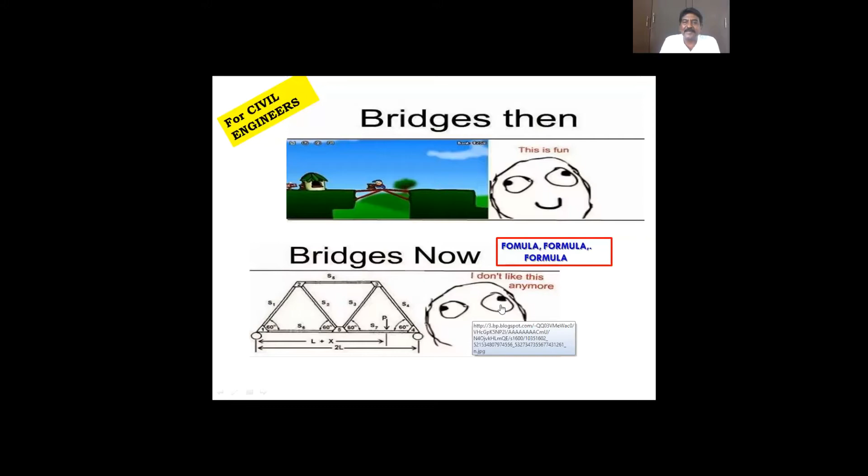But after becoming civil engineers, we were flooded with formulas, method of sections, method of joints, everything. And now we see not only bridges but all civil engineering structures through formulas. But that should not be the way of learning. You must have a passion and love towards our work. Then you will become a successful engineer.

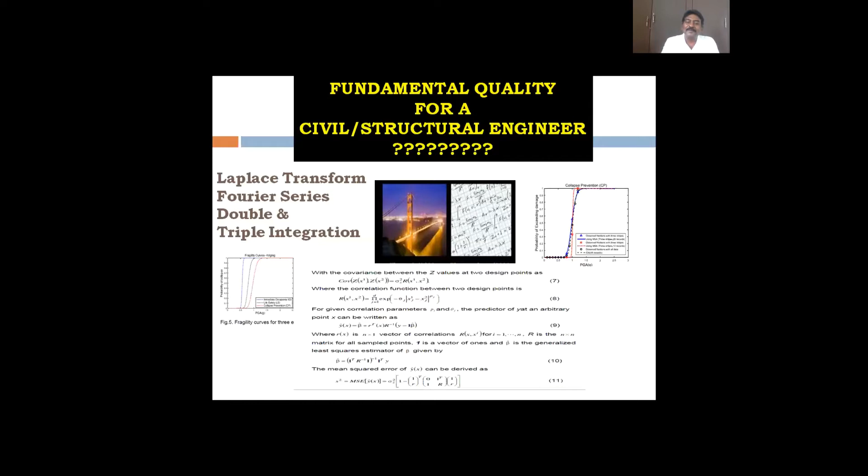What we are taught as a fundamental quality for a civil structural engineer is Laplace transform, Fourier series, double and triple integration, and so many other things. But just forget about all those things, and then you can become a very, very good structural engineer.

What you should learn? You should have common sense, that's all. Any engineering is nothing but common sense. You can become a successful civil engineer or structural engineer if you have good common sense.

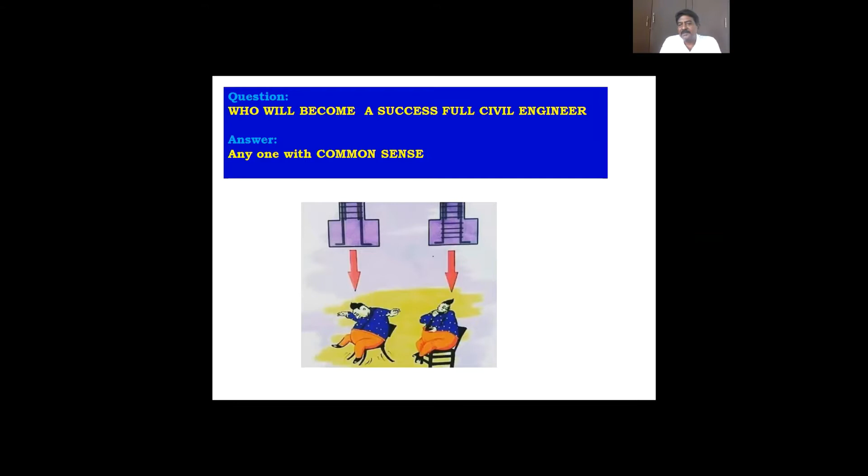For example, when you see a section of a footing with column rods going inside, its analogy is a chair without ties. Vertical legs are there, no ties, it will split and spread away. Whereas just by putting some stirrups, lateral ties in the rods, it will not spread. Such an approach, such a feel you have in civil engineering or structural engineering, then with common sense, you can make a great success in your career.

But there is always a stage, converting a fresh engineer or beginner into an experienced one is the toughest job. Because a fresh engineer needs experience, but job providers need an experienced person. So there is a little gap. So when you join a job, you can become a successful civil engineer by learning not only from books, but also from practicing senior engineers, whether directly or indirectly, by attending these types of webinars or reading technical books.

When I was young, in the late 90s, 98 and 99, I was assigned the job of analyzing the stability of this huge statue, which is called the Thiruvalluvar statue, located at Kanyakumari in Tamil Nadu. Its height is about 133 feet. Such a huge tall structure proposed on a coastal area, made up of pure stones only.

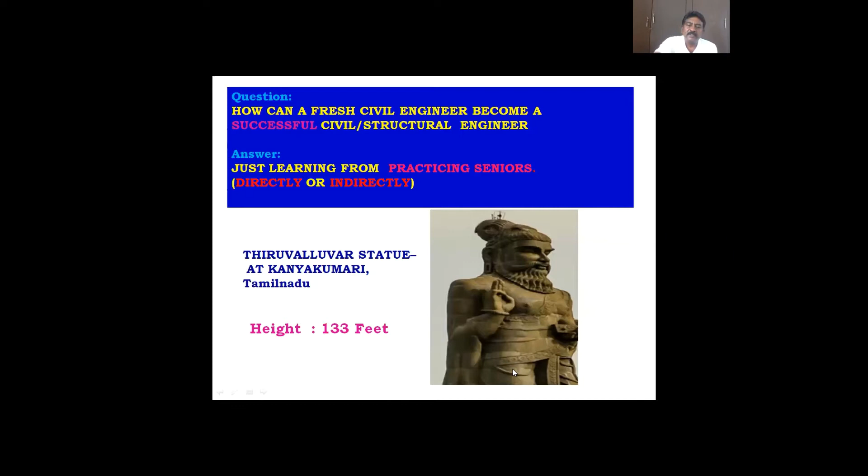This is the Thiruvalluvar statue. Tamil people know the Thiruvalluvar statue will be like this. The portrait of Thiruvalluvar traditionally has the bun, the hair arrangement vertical, like an inverted cone. This is the actual portrait of the Thiruvalluvar statue.

When I was given the drawing, at that time computers were not so popular, not handy. So I was given a sketch by a Sthapathi, a skilled mason. He gave me the hand sketch, and I embossed it or placed it on a big graph sheet, and counted the area at all stages, starting at foot, leg, hip, neck, and I at last came to the head also, then the bun, the vertical portion.

The formula popularly we use to find out the tension created in the masonry structure - we must avoid tension in masonry structures - is stress equals P by A minus M by Z. This P by A is our favorable stress, due to the weight of the structure. But this M by Z is the overturning stress, our unfavorable stress.

When I checked the stress at the hip level, neck level, or foot level, this factor was high because the load P, the self-weight, was higher at bottom. When I go further up, this first term became very, very small. Whereas because of this high wind force, this overturning term became so large.

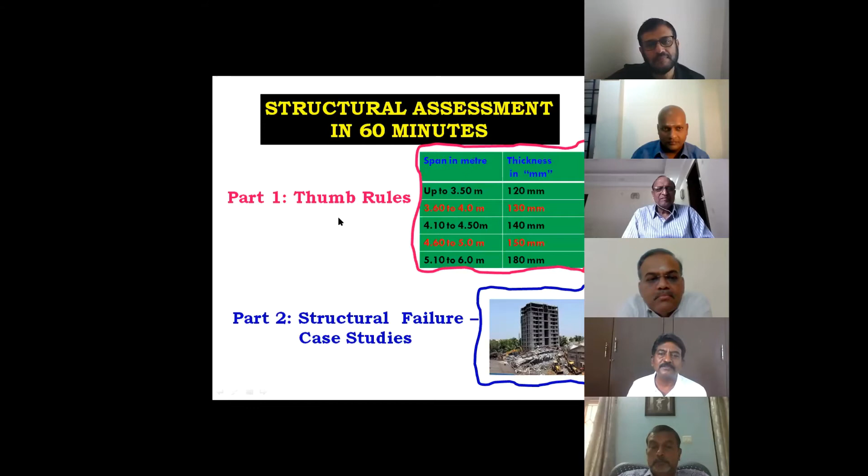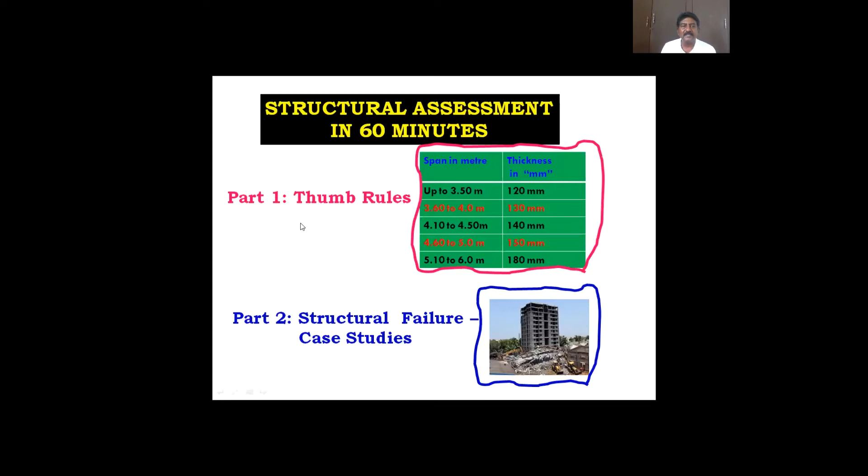Very easy thumb rules. Next we'll cover structural failures with one or two case studies. When I say thumb rules, I will show you how to calculate slab thickness in a few seconds just by looking at the building, and how to assess the size of beams by observing the span. It's very simple—learning structural design is learning only four things: slabs, beams, columns, and footings. These four elements make the entire structure, and learning them is what we call structural engineering.

Normally slabs carry the loads, but architects, builders, developers or users want only the slab—they want to take rest in the slab. They don't want beams, columns or footings. But we civil engineers have to transfer the slab load to the beams, from the beams to the columns, and from the columns to the soil through the footings. Though it sounds childish, brick wall loads go to the beams, then to the columns, then to the footings. If the person in charge of that building which failed in 2014 in Chennai had understood that wall load must go to the column through the beam, he could have avoided the failure or cautioned the concerned persons. So the understanding is: load must go from slab to beam, beam to column, column to foundation.

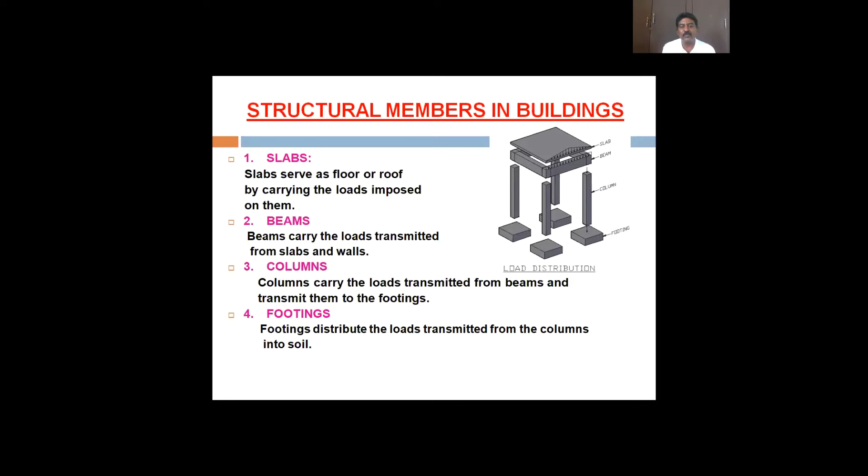Suppose your brother, who is buying an apartment, asks whether the slab thickness being provided under construction is okay or not. Many things will flow to mind—L by 26, L by 32, modification factors, curves—but nothing useful will come out of our mouth. Your brother will wonder how you're in the final year of civil engineering yet can't assess the thickness of a slab. So there's a thumb rule that a group of structural engineers developed themselves for quick appraisal, and this is what we follow.

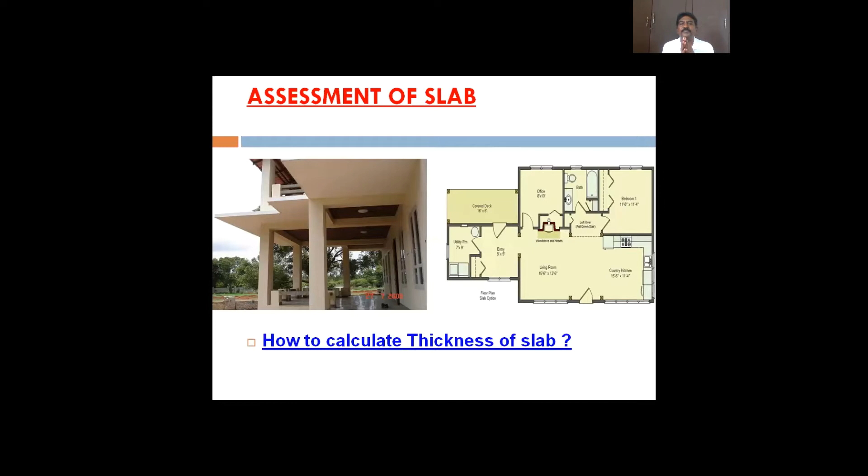For a slab, suppose the short span of the room or hall is 5 meters. Just multiply by a coefficient of 3. That gives 15 centimeters, or 150 mm—that will be the slab thickness. I'm staying on the conservative, safer side. Suppose the short span is 6 meters—multiply 6 by 3, which gives 18 centimeters, 180 mm, or about 7 inches, as the slab thickness.

Similarly, if the span is 4 meters, 4 into 3 gives 12 centimeters. Just by multiplying by 3 you can appraise whether the provided slab thickness is adequate. I've also provided a table with more accuracy for varying spans, like 3.5 to 4 meters, but this rule you can remember by heart. However, it won't hold good for cantilever slabs. There are two vulnerable structures in our buildings—one is the cantilever, the other is floating columns—with which we must be very careful. For cantilevers, the thickness to be provided will be span by 10.

Suppose you're providing a 1.5 meter span. When I say span here, it's the projecting length, like a sunshade—you can assume a sunshade projection, which is normally 600 mm or 0.6 meters. If it's a projecting balcony of 1.5 meters, just divide by 10, and you'll get 150 mm. So 1.5 meters means 1500 divided by 10 gives 150 mm.

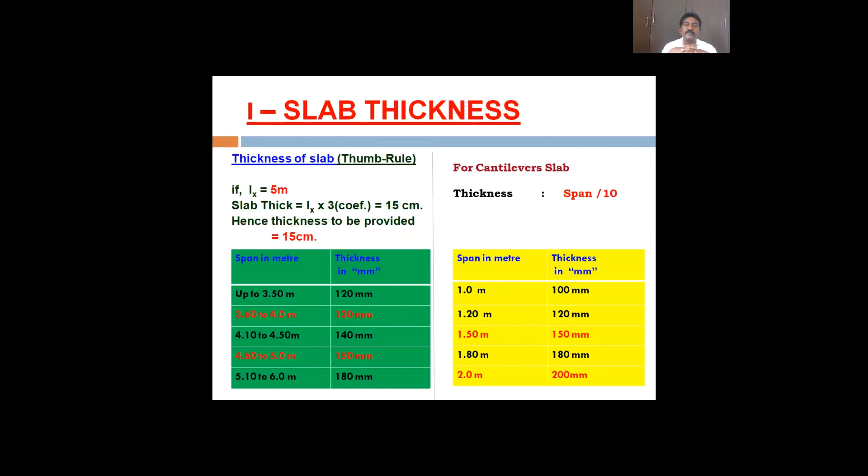So these are the two techniques I used to follow. Even students doing a rigorous analysis in Staad or ETABS have to assume the slab thickness themselves—no software tells you the slab thickness or beam sizes; you have to assume something. So before doing detailed analysis, you can make use of this rule. Now coming to the appraisal of beams, we calculate the beam size—this is also very simple.

You just assume some general grade of concrete, but the span is 6 meter. Just I have to multiply by a factor or coefficient from 7 to 8. That means for a 6 meter span, you multiply by coefficient 7 or 8, and the depth will be 42 or 48. The depth will be somewhere in between this.

This is how I used to calculate when I go to assess the stability of the building. I won't even use a calculator. I will just see 6 meter is there, and in mind I will say 6 into 7 is 42, 6 into 8 is 48. So in between them a round figure will be 45.

Or you can say 7.5. So it varies from 7 to 8 for a good design. So I will adapt a depth of 45 centimeter or 450 mm for a 6 meter span. The thumb rule is just multiply by 7 or 8.

And the width can be either 300. When I say depth of the beam is 450, it includes the slab thickness also. Slab thickness will be 150, and 300 will be the rib projecting portion down, which is shown exposed outside. 300 plus 150 makes 450. Whenever an engineer says depth of the beam, it includes the slab thickness also.

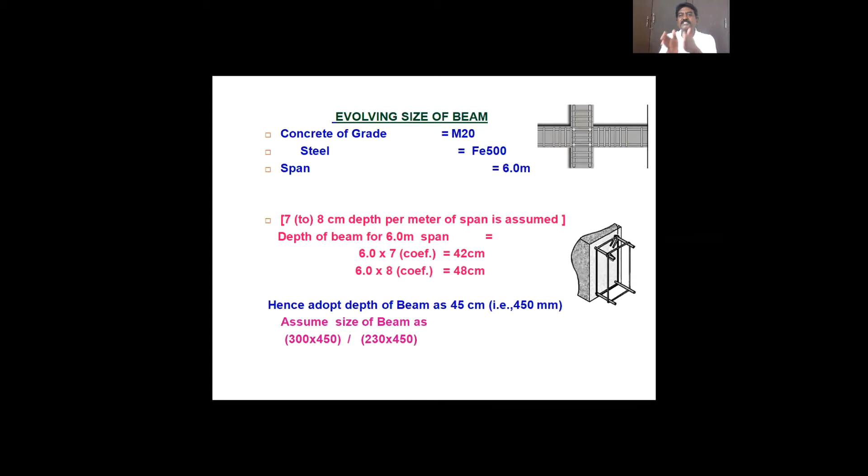So either you can give 300 by 450 or 230 by 450, but I will conclude like this: multiply the span by 7 or 8. So I will repeat, for the slab you multiply by 3, for beam you multiply by 7.5. You don't need to go for detailed calculation and all.

Column size. Is there any rule to say for a 1-story building this will be the column size, because it's 3 meter? If it is 6 meter, you multiply by a coefficient and the size will be like this. It cannot be categorized like that, because beams and slabs are flexural members.

Beams and slabs are flexural members. They fail by bending: WL square by 8, WL square by 10, L square will come. The failure will be due to moment, L square. So the dominating parameter will be the span of the beam or span of the slab. That's why I was able to arrive at a coefficient based upon the span.

But here the column will fail predominantly because of axial load. Compressive load from slab, beams and all will come to the column. The controlling parameter majority is the axial load; of course bending moment will also be there. So I cannot say this much size for this height and all.

So what I have to do, I have to do in 2 steps. One thing is I have to calculate load on column on one hand. On the other hand, I have to choose a particular section which will be capable of carrying this load. So 2 steps: load on column calculation, and choosing a particular section to suit this load on the column.

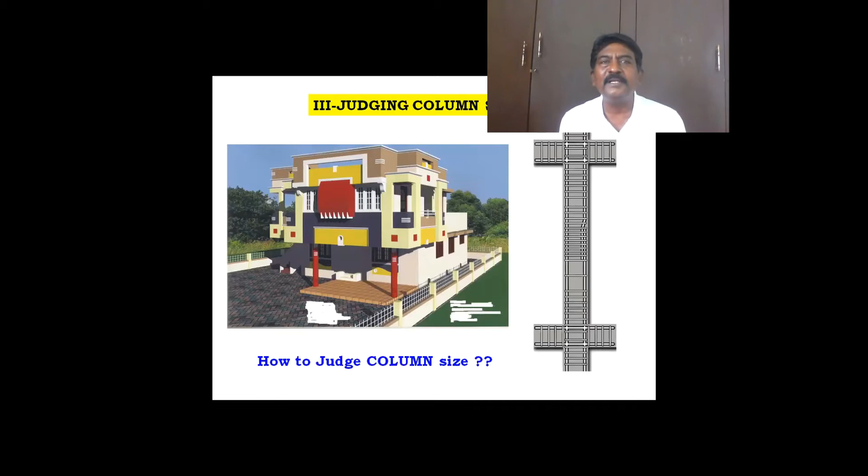But normally, we all know, if my neighbor asked me, I am going to build a house in Chennai at Besant Nagar, how much will be the cost of the building? If he asks, then immediately I will ask him, what is the square feet of the building you are going to build? He will say 1,000 square feet. Then I will multiply the 1,000 by a coefficient, the rate, unit cost, say 3,000. Then I will say immediately 1,000 square feet into 3,000 per square feet will be the rough cost. So 30 lakhs you have to spare. You have to make a fund for 30 lakhs, I can tell.

Similarly, just by seeing the plan, is there any unit load that comes on the column per square meter? Then that will be easier for us to calculate the load on the column in a single step. Yes, there are coefficients like this. We have residential building and office building categories. For interior columns, that coefficient will be 12, you can assume 12. For edge columns, you can assume 17.

When I say edge columns, it will be other than corner columns in the boundary, I call it edge column. 12, 17, 22. Based on our experience, it includes all the loads - wall load, slab load, beam load, column self load, everything per square meter load in kilonewton per square meter: 12, 17, 22.

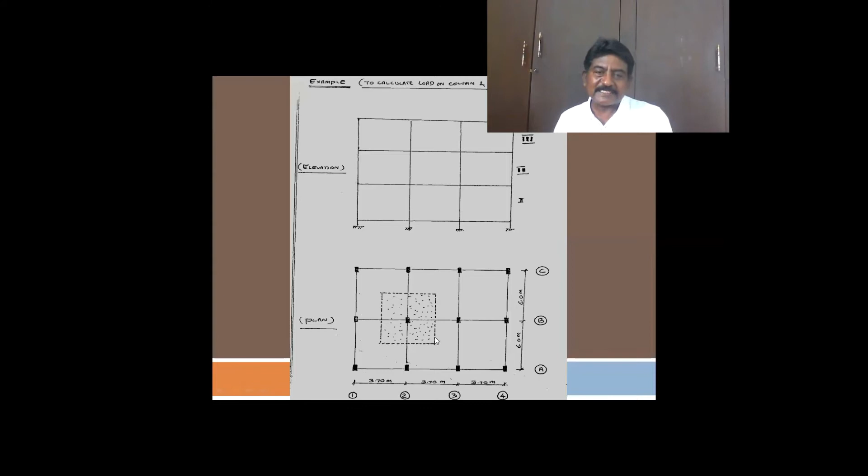6 meter. I'm very poor in drawing, that's why 6 appears to be same as 3.7, but still I am called a good structural engineer. 6 meter is this one, 6 meter this one. So 6 into 3.7 will give this area, that's all.

So 3.7 into 6 will give 22 meters square. 22 meters square - this is the influencing area. Slab load, wall load, beam load, everything in this area will come to this. That area I have calculated - that is 22 meters square.

Being an interior column, I multiplied the area by a coefficient, 12. 22 into 12, you will get 264 kilonewton. The total load on the column will be 3 times since 3 stories are there. So 3 into 264, you will get 792 or 800 kilonewton.

So you just remember this, how to work out this influencing area, and you get the load on the column.

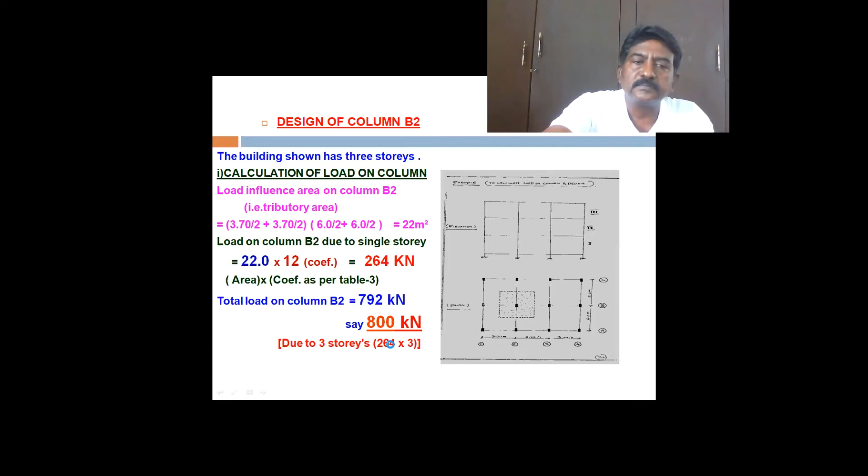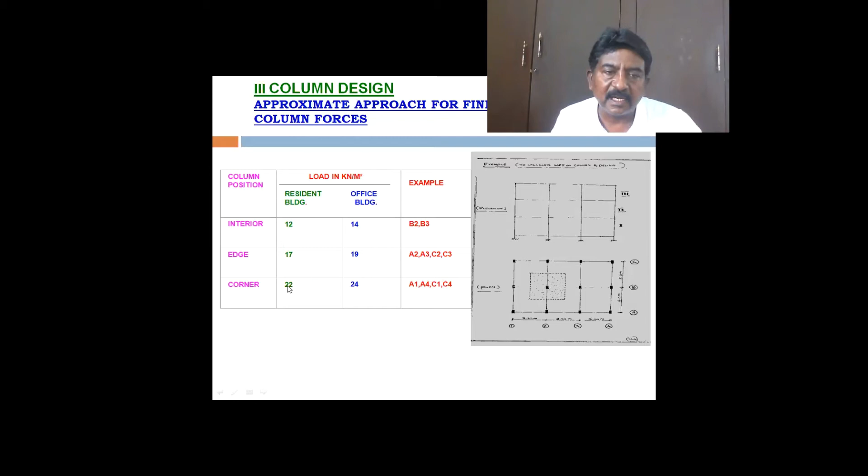So this is the coefficient I mentioned for interior column, 12. If it is an edge column, I will multiply the respective area by 17, and the pro rata area of the corner column by 22.

Then I will go to a table like this - a little attention is needed. We will not be using this table, don't get scared. I will explain what is in the table and then switch to an easy technique.

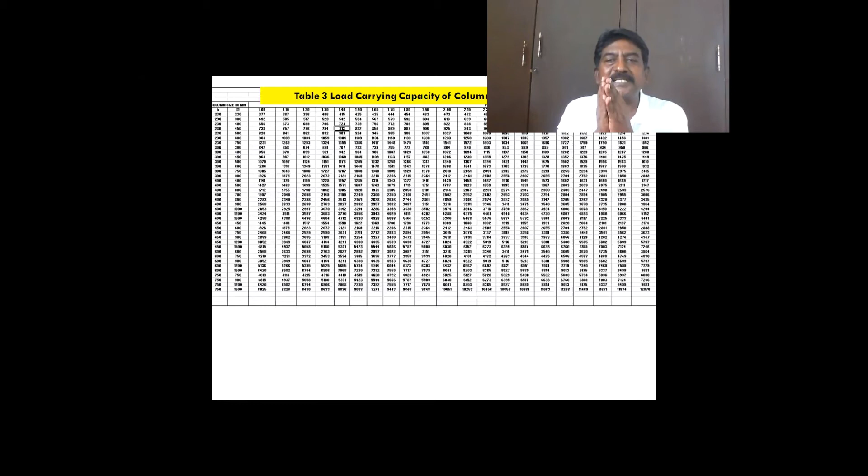Whenever we say column, the column load is shared substantially by concrete and also substantially by rods, the reinforcement. So if you provide more reinforcement in the same column size, you will get more loading capacity. So load carrying capacity of a column is decided not only by the size but also by the percentage of reinforcement provided.

So this table has the size of the column in the vertical columns - we have 230 by 230, 230 by 300, 230 by 450. And here we have percentage of reinforcement - it starts from 1, 1.1, 1.2, and goes on up to 2.73 or something like this.

So if I want a column to carry 800 kilonewton, I will go here and select 230 by 450, and I will find 794 and 830. So my load on column which worked out is 800, so I will choose a column 230 by 450 with a reinforcement of 1.4%. This is how I can choose.

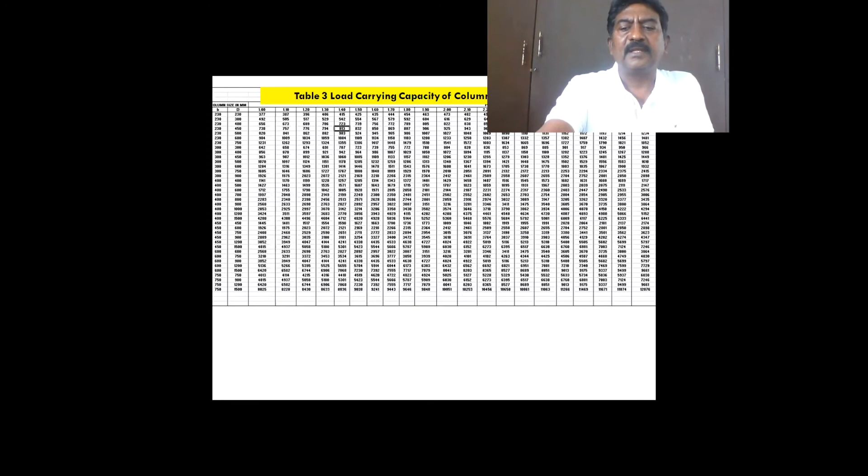It's a usual method only, but I will tell you a secret behind it. Without using the table also, you can somehow assume or assess the column size.

You see here, I have enlarged the previous table and produced a portion of it - 230 by 230, percentage of reinforcement only 2.6 I have chosen, and the load carrying capacity is like this.

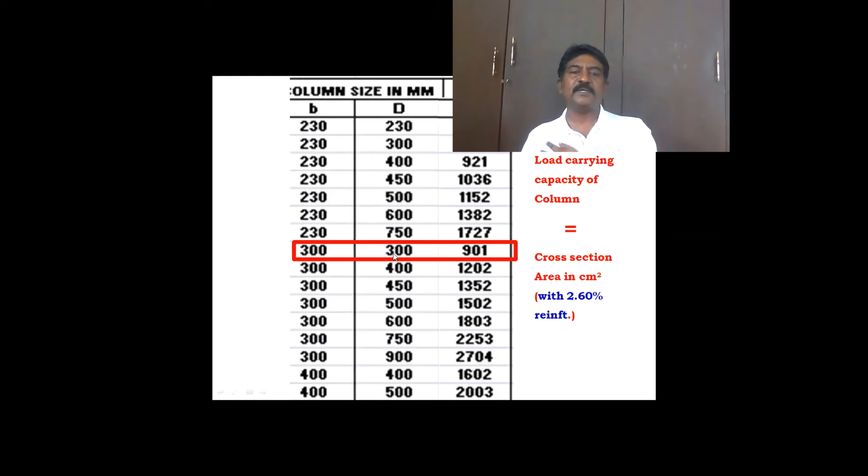So if you have breadth as 300 and also depth as 300, for illustration, 30 centimeter and 30 centimeter. You just don't multiply 300 by 300, you multiply 30 by 30, that will be 900. This is the load carrying capacity. So a 30 centimeter by 30 centimeter column, if you provide 2.6% reinforcement for M20 grade, you will get 900 kilonewton. This is one rough method of assessing the column size.

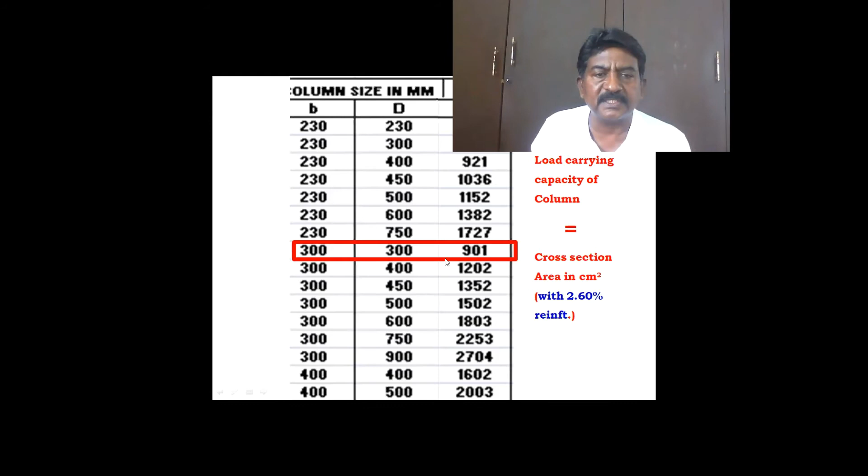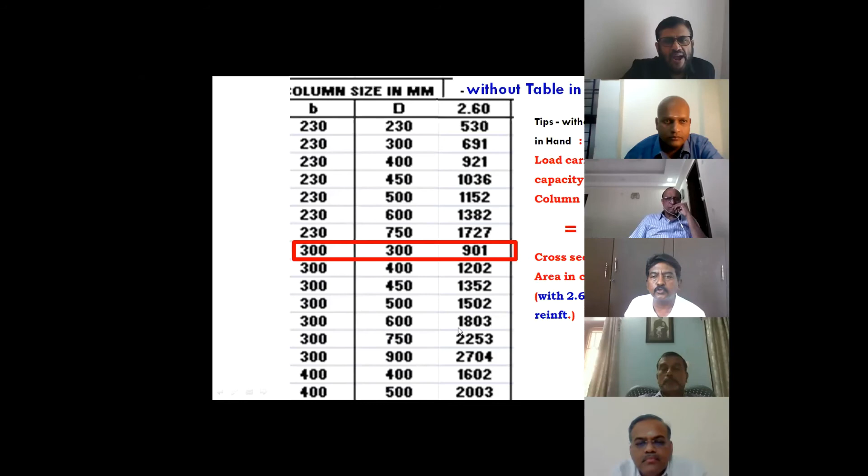For example, if you come to 300 by 400, 30 into 40 will give 1200. For 300 into 600, 1800, with 2.6% reinforcement. So just remember, load carrying capacity of column is cross section area, of course, if you provide 2.6%.

You just remember this, because when I go to the case study on failure of column, you yourself will be able to tell what should have been the column size there. So load carrying capacity is nothing but cross section of the column with a particular percentage of reinforcement.

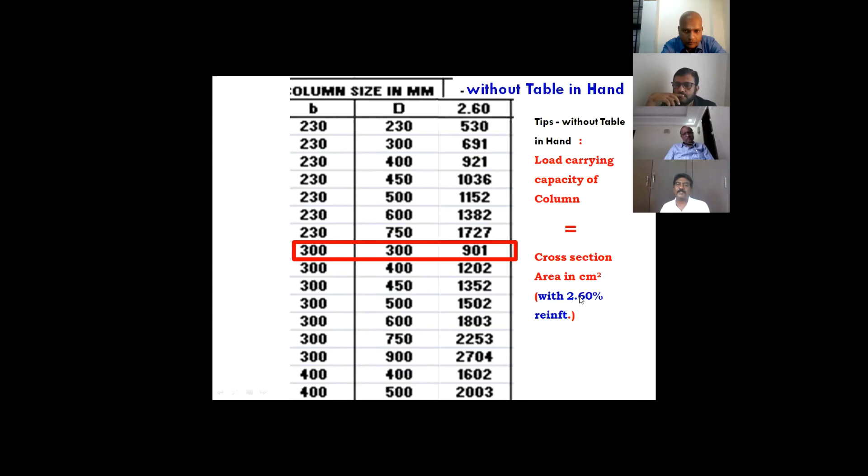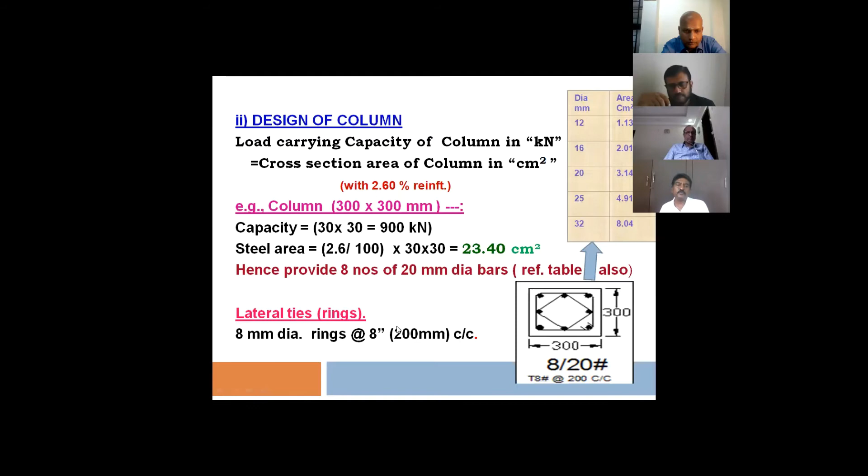So you can put this 2.6%, and also you can find out, if you work out the 2.6 by 100, the size and all, you can find out the reinforcement also very easily. But the IS code says you can conveniently go up to 4% of steel in the columns. If there is no congestion, you can go up to 6% also.

But what is the economical column? Based on our experience, a column with the percentage of steel varying from 1 to 2% will be economical. In India, site-made concrete is cheaper than factory-made steel reinforcement. So it is always better to have a reduced steel percentage to have an economical column. In that case, 1 to 2% reinforcement is generally economical.

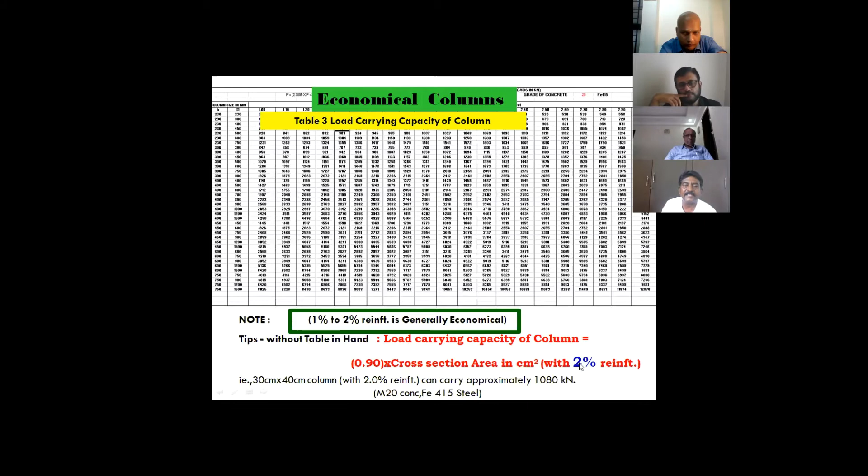But I said cross-sectional area will be the load carrying capacity if it is 2.6% reinforcement. But when 2% reinforcement is provided, just multiply the cross-section area with 0.9. So load carrying capacity is 30 into 30 into 0.9, because we are reducing the reinforcement, load carrying capacity will be reduced, but by only 10%. So having this in mind, if you provide 2% reinforcement instead of 2.6%, then with 2% you get 800, 30 into 30 will be 900 with 2.6%.

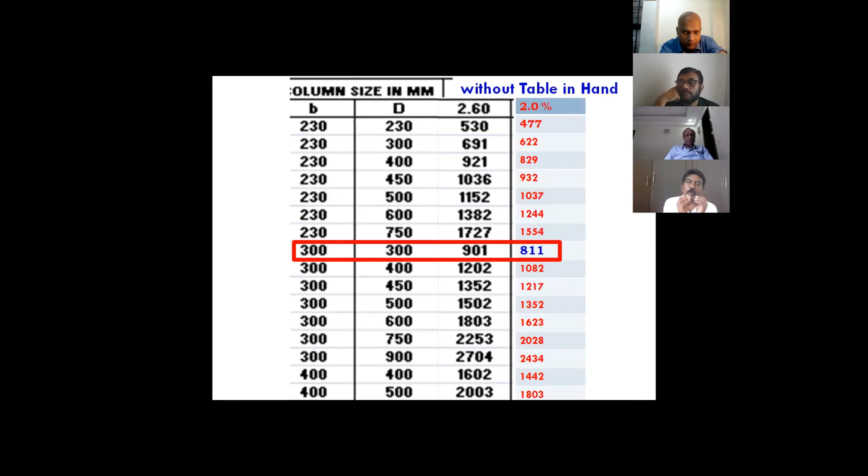So this is how it's a little tough for a structural engineer to assume the column size before doing the detailed analysis. To suggest the architect the column size in the planning stage is little difficult for structural engineers, but with this technique you can overcome that difficulty. And for this 2% also I worked out something. So with this, I have covered some thumb rule techniques for slab, which many of us know, thumb rule for beam, which most of us know, and column thumb rules, which only few of us know.

I remember a story. There was a primary school teacher who was handling a geography class. She was teaching about the mother planet. She was telling, our mother planet is the great one, it is in the solar system, and it has so many mountains, rivers, and it consists of 7 continents and all.

And before closing the class, a student boy stood up and asked the teacher, "Madam, I am very happy to see our mother planet is made up of so many rivers, mountains, continents and all. But what is the weight of a globe? What is the weight of mother Earth planet, madam?" she asked. But madam didn't know the answer at that time, because no one can be a master of everything.

But she didn't want to reveal in front of these kids that she was unaware of it. She told them, "It's a very good question, but it has come at the end. I leave it to you as an assignment. You do the assignment and come and submit it tomorrow."

As the class was over, the students went home, and madam went to the library referring to some encyclopedia or something. She was able to find out the weight of mother planet is 6,000 trillion tons. She noted it down, 6,000 trillion tons, 6,000 trillion tons. And after coming to the next class, as soon as the students assembled, she asked, "How many of you have done the assignment?" As usual, none had done it.

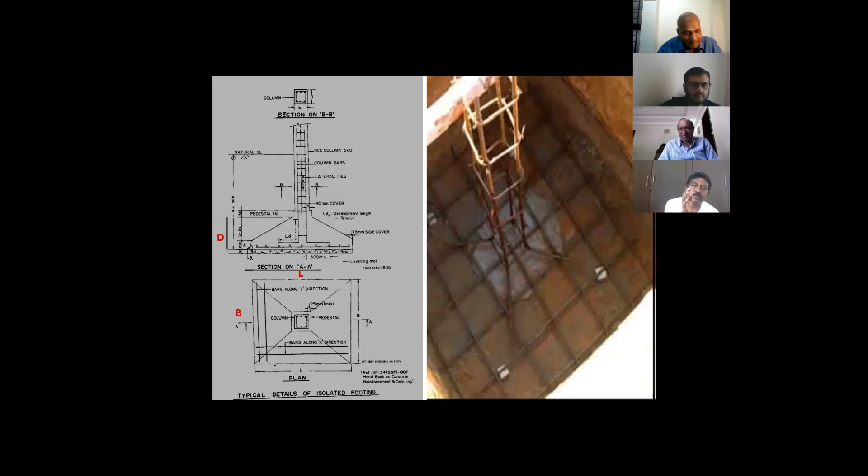Similarly, we have worked out, similar to columns, the load on columns. Say the load on the column is 800 kN in hand. But one more parameter which plays a major role in deciding the footing size is SBC, safe bearing capacity.

Like COVID-19, nobody has identified a method so far to assess the correct SBC of the soil. No soil consultants agree with each other - one will say SBC is 200, another will say 250, one will say 150. So it's very tough to exactly determine the SBC of the soil.

But still, if I give the following thumb rules for hard soil or soft rock - SBC of clay is assumed as 100 and coarse sand as 150 kilonewton per meter square, or 10, 15, 25 and so on. You just buy into it. But if there is any geotechnical consultant or soil mechanic, they will scold me - a lot of factors are there. But still, for estimate purposes or small buildings, just by observing the trial pits or excavated earth, you can assume it and it will work out well.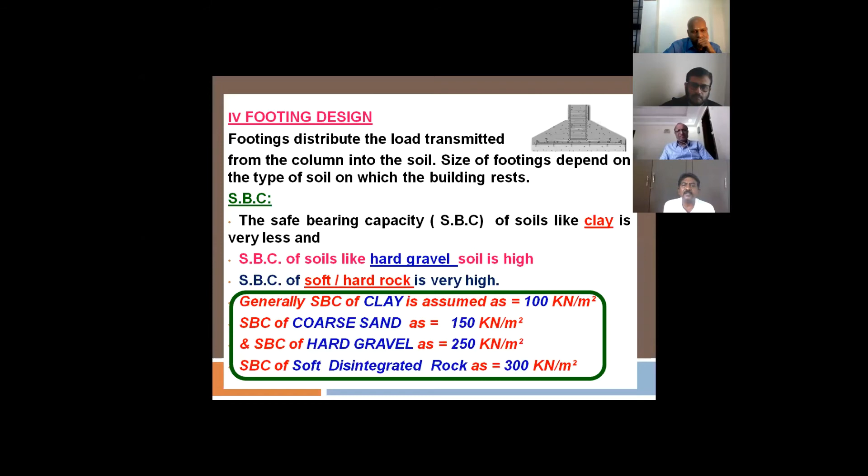So knowing this and knowing the load on the column, you can find the area of the footing. Normally with 800 kN load, 80 ton, we add 10% for the self weight of the footing. Say clay means immediately it strikes to my mind 100 kN per meter square as the SBC. Then the pressure due to this should be less than 100. When it is less than 100, you provide 3 meter by 3 meter - so 880 or approximately 900. If you divide this by 3 into 3, you get 98, which is less than 100. So reverse, you can work out the load by SBC to give the area of the footing, and find the size of the footing. Load divided by SBC gives area of the footing.

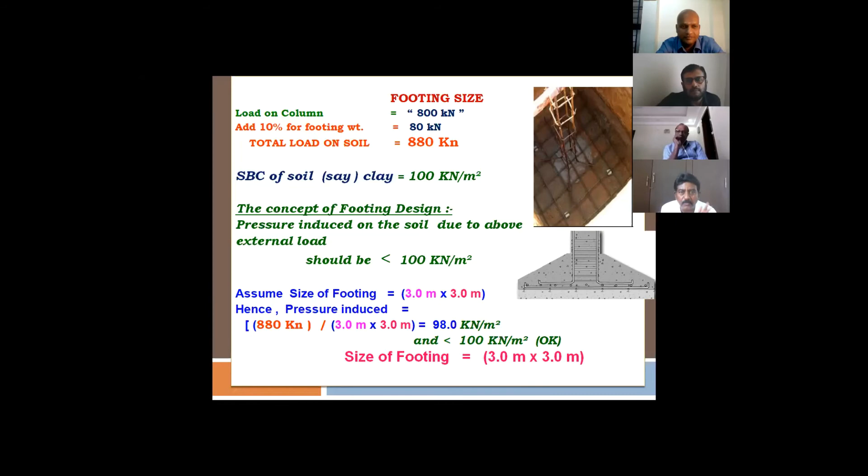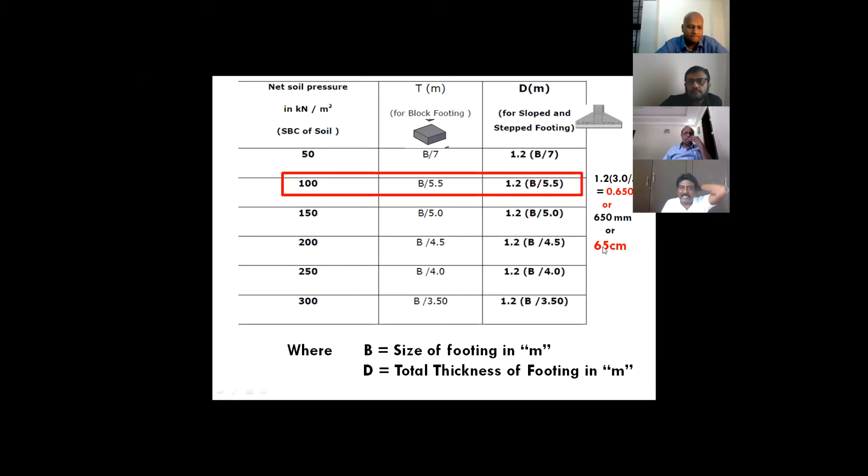We also have thumb rules for the size of footings, which is rarely found. Knowing the size, there are coefficients - 7, 5.5, 5, 4.5, 4, 3.5 - for various SBCs of the soil. You divide by this coefficient to get the thickness of the footing. If it is a block footing, which we adopt nowadays, for SBC 100 with footing size 3 meters, you divide by 5.5. For coarse sand at SBC 150, you divide the size by 5. With 3 meters, 3 divided by 5 gives 600 as the footing thickness, something like this.

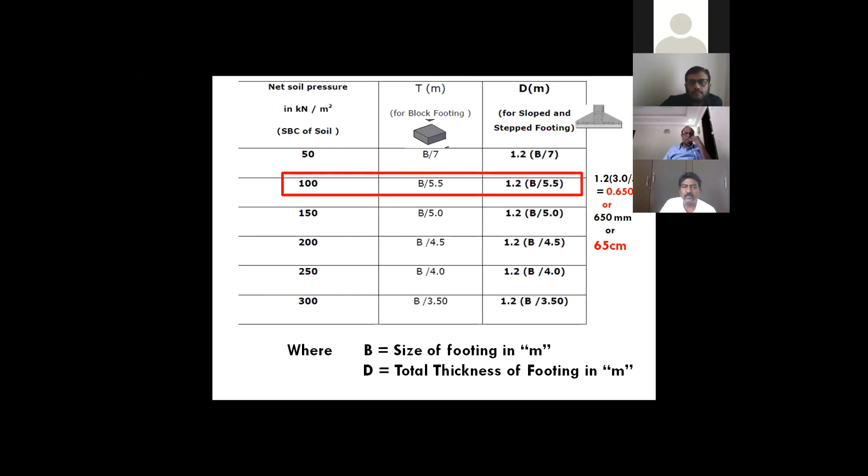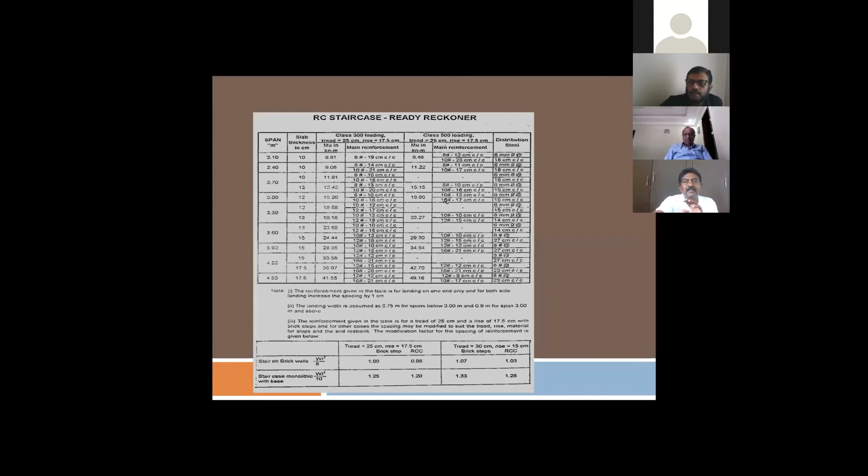So you can work this out, and you can develop a lot of tables like this for grade beams, for staircases. You can develop your own tables - my advice is not to just agree with me, develop your own ready reckoners or thumb rules, verify or exercise them in your projects, and you will get confidence to use it.

I have covered the first part on thumb rules, but you must handle those thumb rules with care, because I made a lot of assumptions. It cannot be said equivalent to a detailed structural design, but for an emergency or preliminary design, you can make use of these techniques. It will be more applicable for moderate span buildings, and I assumed a full wall all around.

I assumed this for these coefficients: full wall all round, which is the usual case in buildings, and partition walls of brick wall inside the buildings. That is my assumption. But for staircase portions, toilet portions, columns and beams, you have to make some additional loads based on some common sense.

So many are raising their hands, I'm scared. The spans of these beams assumed are small or moderate, up to 6 meters. These thumb rules will work out well, because this moderate span will not create significant moments in columns. But if significant moments are expected, rational additional loads may be considered based on detailed analysis. So this is applicable for moderate span with usual profile of buildings.

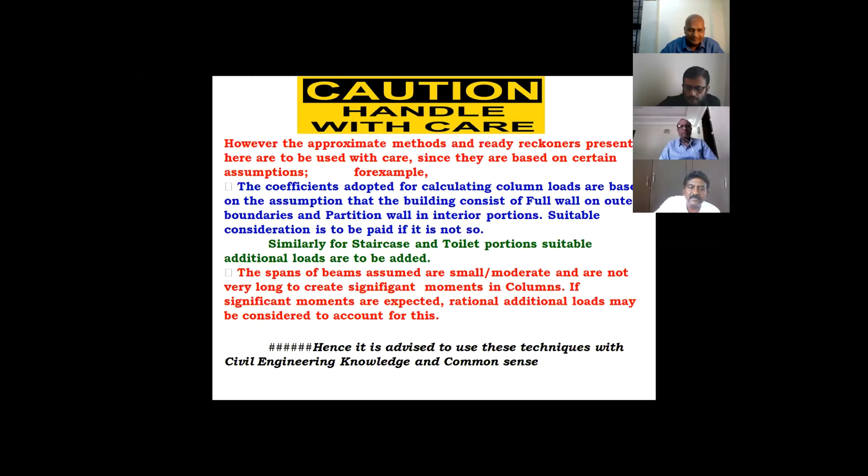Hence, I request all participants to use these techniques with common sense and civil engineering. I won't take more than 5 minutes. We have covered these thumb rules now.

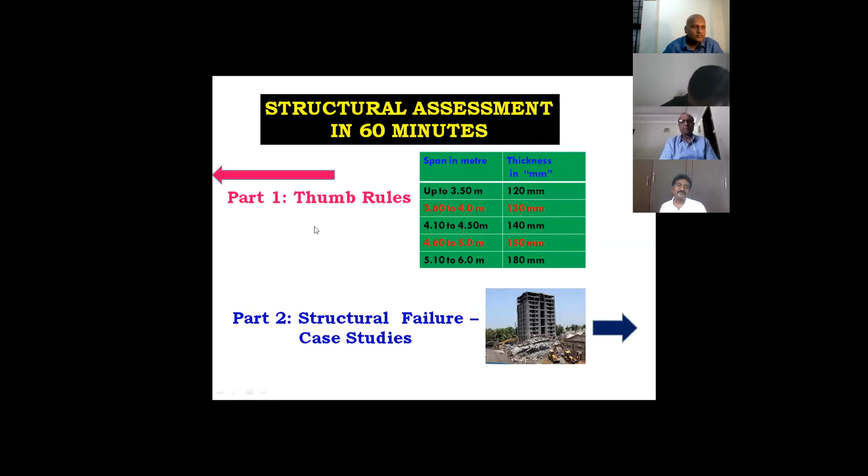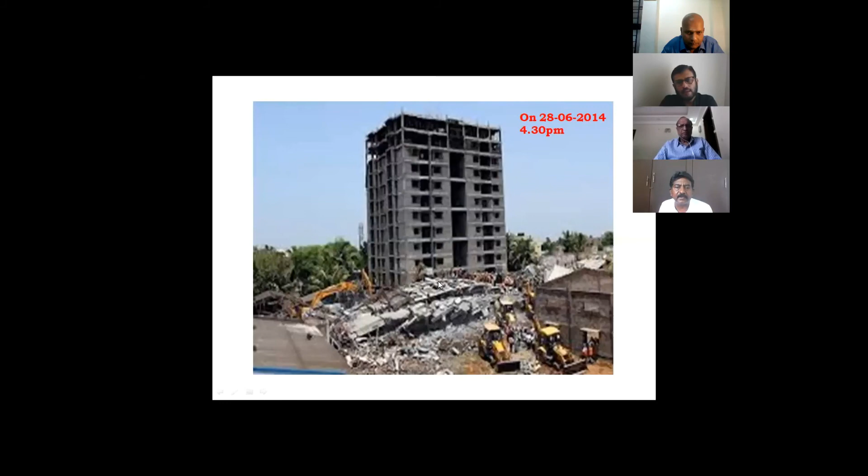Now if you observe this, we have left wing and right wing, connected by alternate floor ties, this staircase height. So during failure, it has split vertically into two halves. Pancake failure. One left portion has fallen left, and the right portion has fallen right. So you can count this like 1, 2, 3, 4, 5, 6, 7, 8, 9, 11, like this. Vertical split was there.

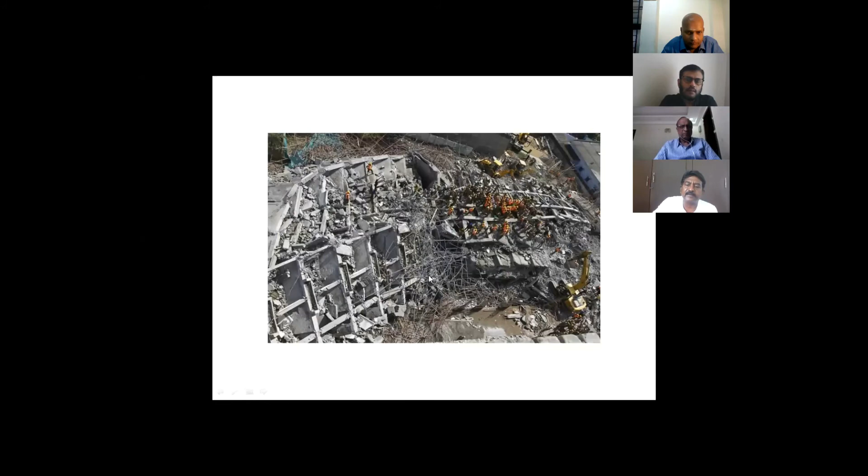So you see these walls, just kindly be keen enough to notice this failed building, how it failed, you will understand. This beam, this wall is there, this wall is there, this wall is there. Only if the column is here, if you provide beam like this and provide wall over here, only if there is a column here, and if you provide wall like this, you have to support a beam like this. From the beam it has to go to the columns. This is the column, like this is the method we know. So this is the short span.

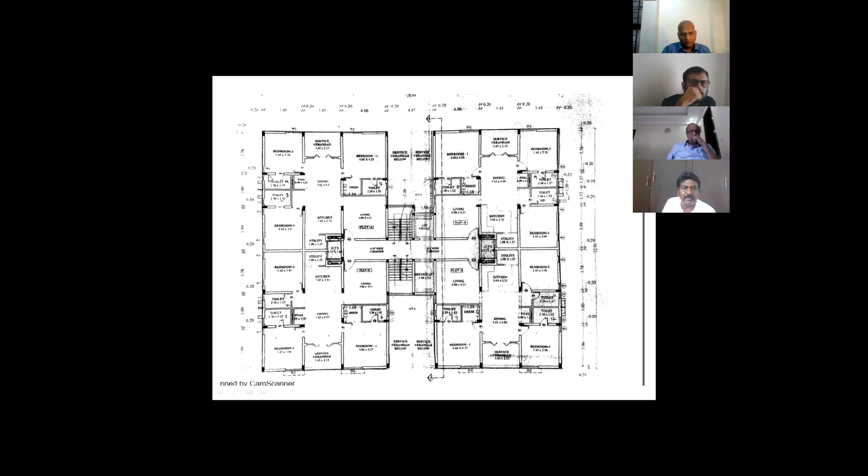But what that fellow has done, he has removed this column entirely. This beam was to support the wall, this beam was to support the wall. He is not able to transfer the load to the column here, because one of the developers or somebody has come and told him it's the driveway. It's very difficult to turn the car, inconvenient to turn the car like this. So remove the column, don't provide the column here. It is not necessary to provide the column here, and they have not provided the columns here.

As a result, all the loads will be transmitted like this to this beam. Previously, this would have been a very short beam with the column here, but now it became ulta, and this became the supporting load beam. All the loads to be carried by the long beam, 20 meters long, and it has to transfer the load to this main beam like this.

But what they have provided as a beam depth for 20 meters, as per our thumb rule, for 6 meters we just multiply by 7.5 and say 45. If it's 8 meters, we say by 7.5, 60. If it's 20 meters, you multiply by 7.5, the coefficient for beam depth: 20 into 7.5 will give 1.5 meter depth. Of course, for such a huge building, a beam of that height should have been provided in this building.

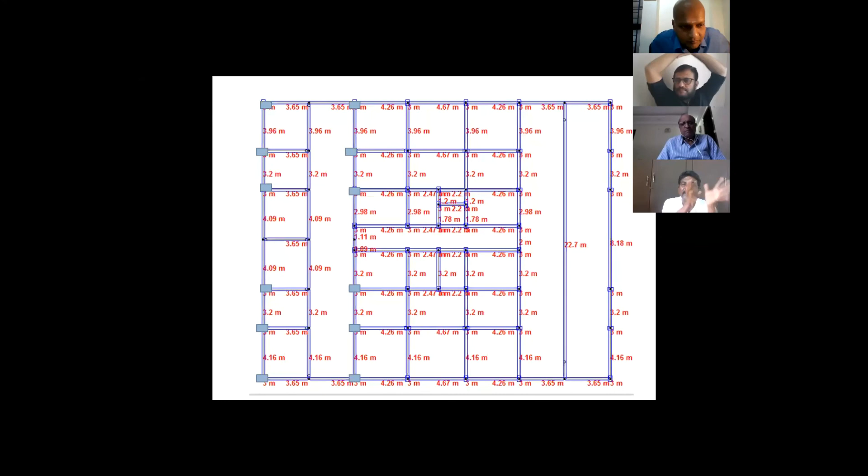300 into 1,200, that much size is needed for even an ordinary vertical load. 300 by 1,200, you can just learn it from our thumb rules which we have discussed. But what those fellows have provided is only 300 by 450. Whether column or beam, they never want to change from 300 by 450, irrespective of the span,

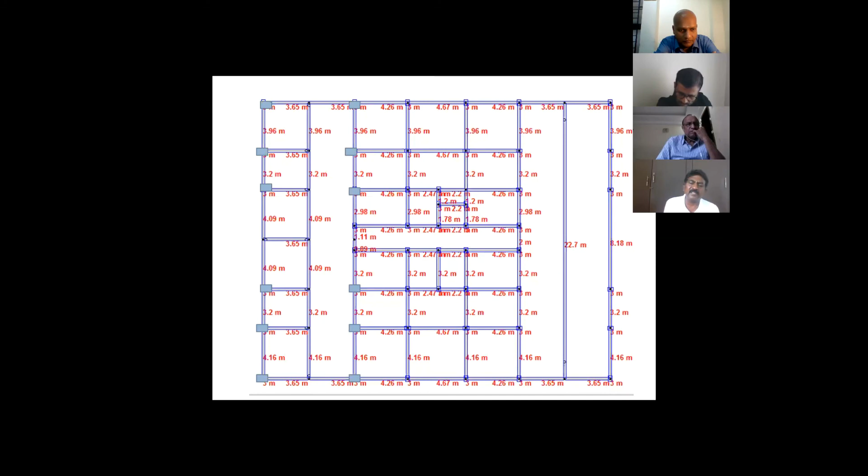And this is the mere pure structural failure because of the structural ignorance and site ignorance and many other faults. Any building will not merely fail because of one reason. There will be multiple reasons.

One of the significant reasons is the design. So you can see this figure now, this column, they have not provided here. This, which, suppose if they would have provided, would have been safe.

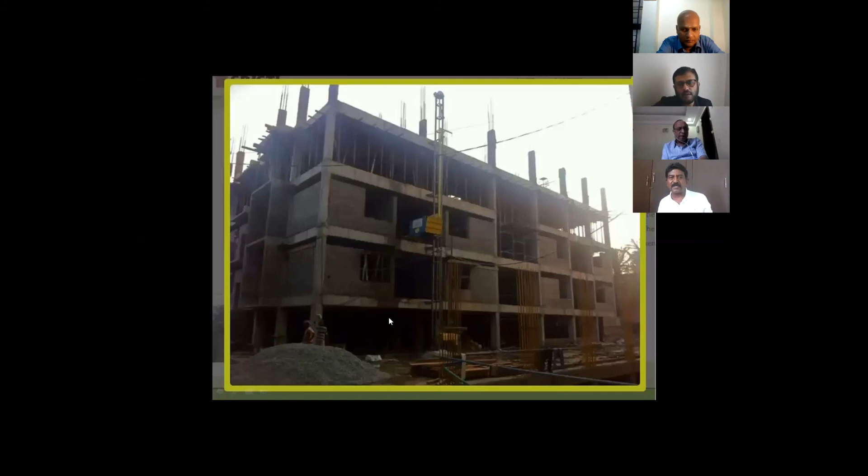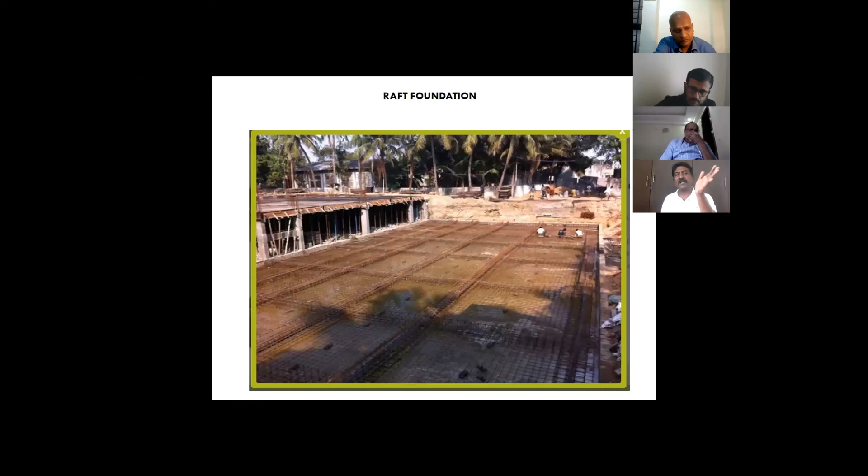And also they failed in foundation also, they provided only raft foundation. Here we have to go for pile for about 20 meters. Soil geotechnical report says we have to go for 20-meter pile for building this 11-story building because of poor SBC of the soil. Hard strata is available at 20 meters. They have not provided that also. If that building has not failed during construction because of structural issues, it would have failed by foundation failure after the people have occupied. So it would have gone the other way also.

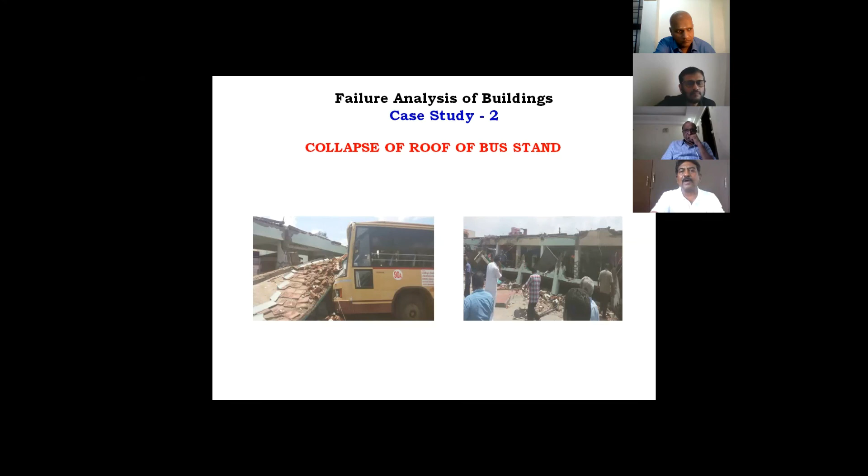And I'm nearly at the end. One more, this collapse of roof of a bus stand in Coimbatore last year. Here also it shows the ignorance of the people.

This is a cantilever slab, just a small structure only. But they have loaded like this. They have added additional parapet wall. They have added 2000 liter capacity on this cantilever slab. Cantilever slabs themselves are very vulnerable.

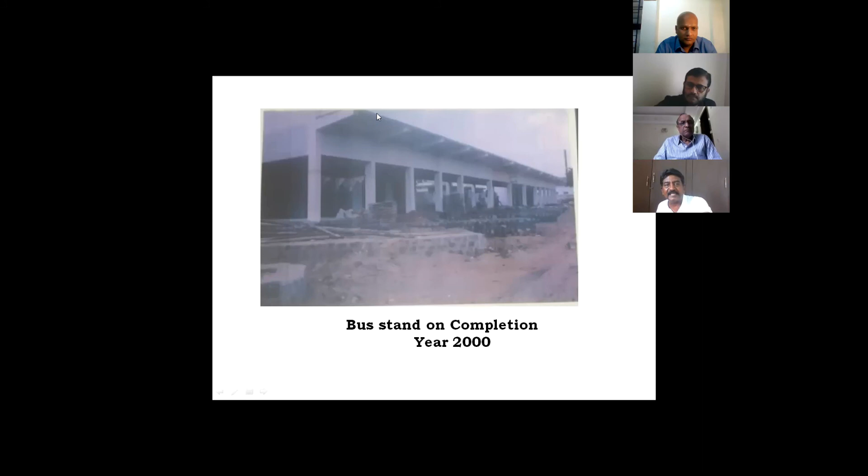They have not provided rod like this. They didn't make it as simply supported continuous. They provided like this sunshade type rod, and it behaved like a cantilever slab. And on the cantilever slab, they have provided an overhead tank and parapet, and they failed to put a drain hole also.

When rain comes, it cannot escape. The entire bus stand roof area will simply act as a huge reservoir. So on the day when it failed, there was continuous rainfall for 4 days in Coimbatore. So all water stagnated there and it made the ultimate collapse.

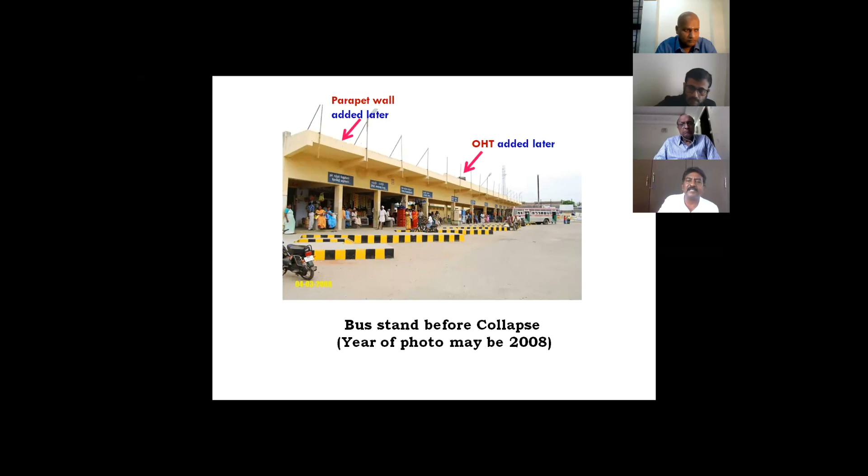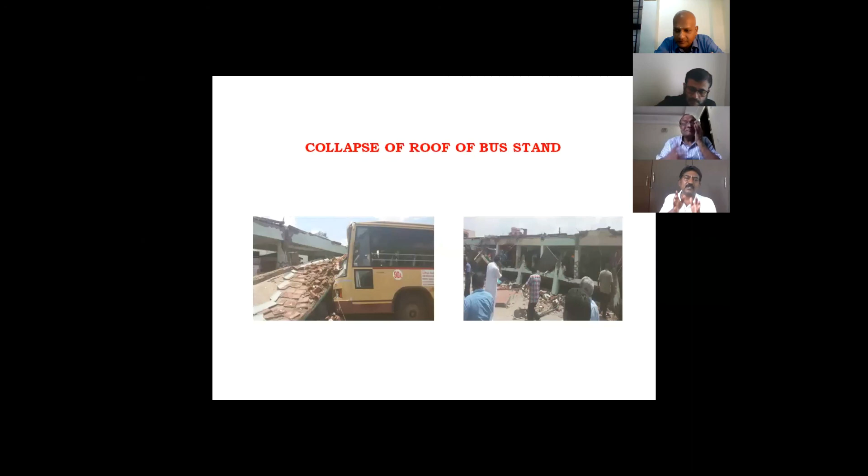What I would like to say is, common sense must be used before loading a building, rather than while designing. While in usage also, the engineer must know the behavior of the structure. If not, one should not go on loading it.

So many times, though we do a lot of hard work using analysis data - STAAD3, STAAD Pro, ETABS - many analyses done, and with the needed structural drawings and all, we send to the site. But there is no supervision.

You can see these types. See, a column instead of being here, it went a little bit away. See, the columns are here, and simply for utility purpose, they have shifted the column unnecessarily here.

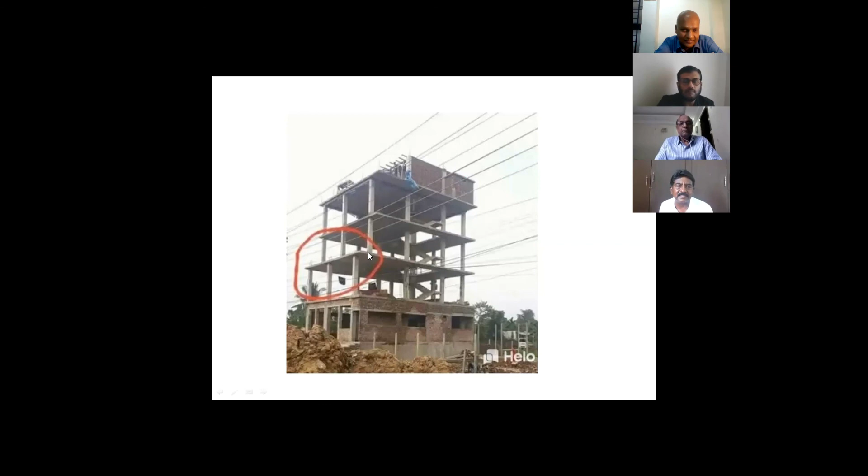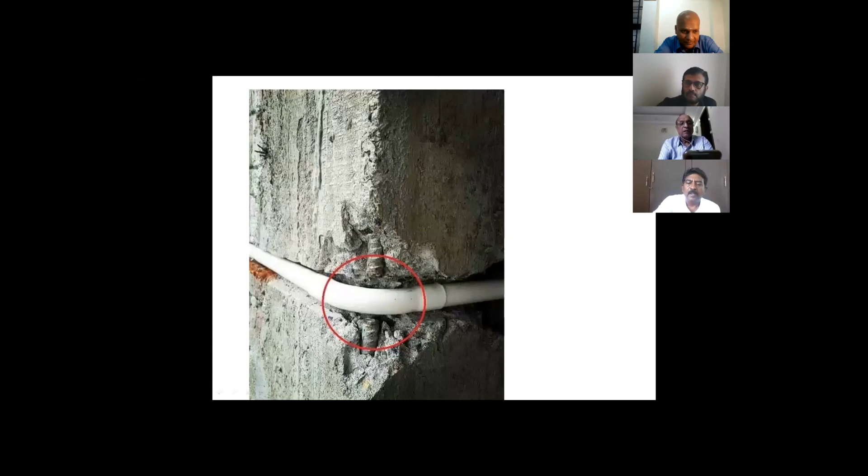See, that fellow is making that wiring, no wire pipe. He has simply broken not only the stirrups and lateral ties, he has broken the main rod also - the main longitudinal bars also. And after plastering, nobody will see this. See, he has broken the entire beam itself. There is nobody who understands the load transfer.

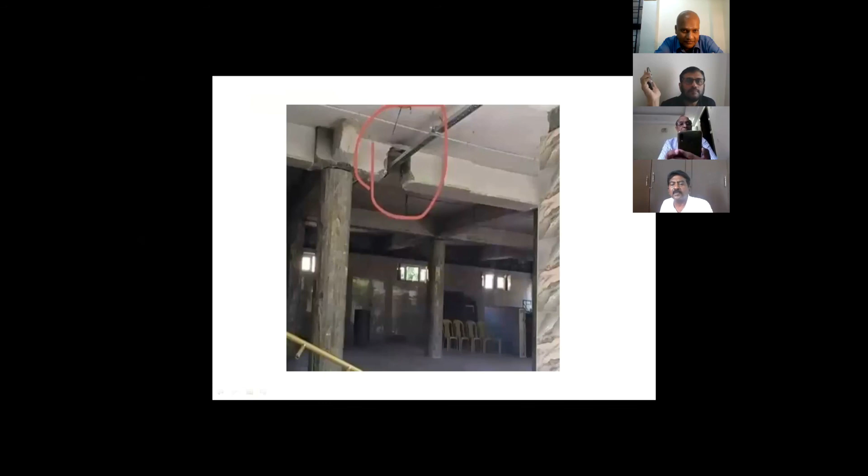Whenever we put some drawings, now we put some cloud markup. By mistake, if it goes to site like this, this may happen.

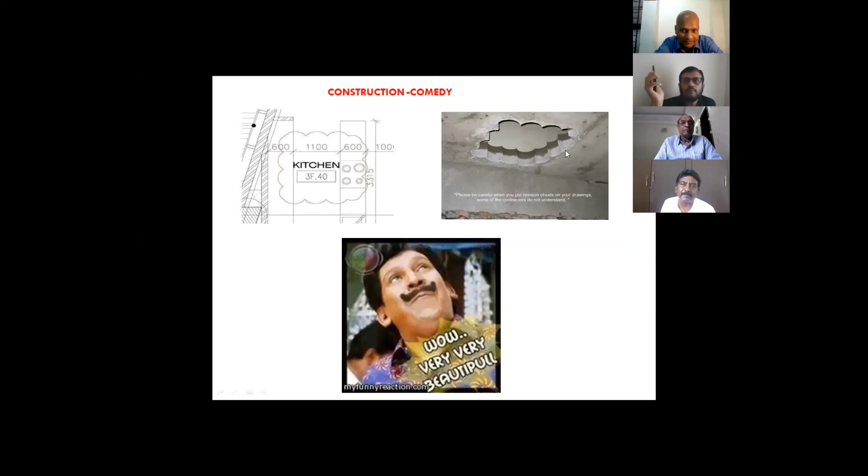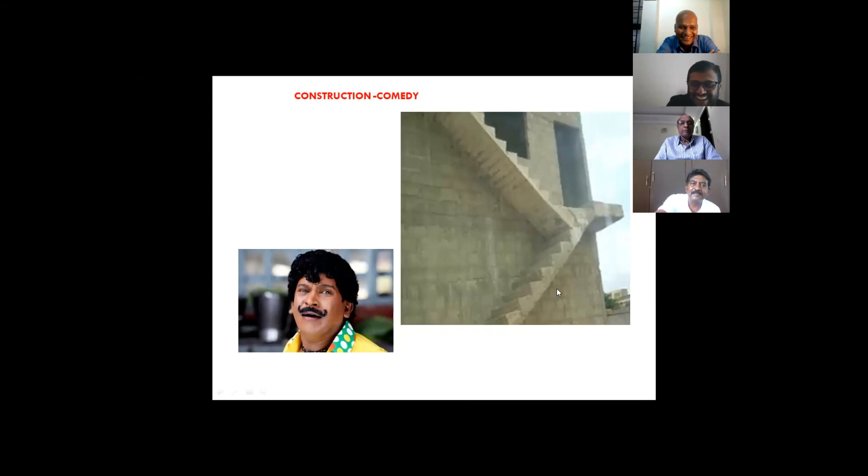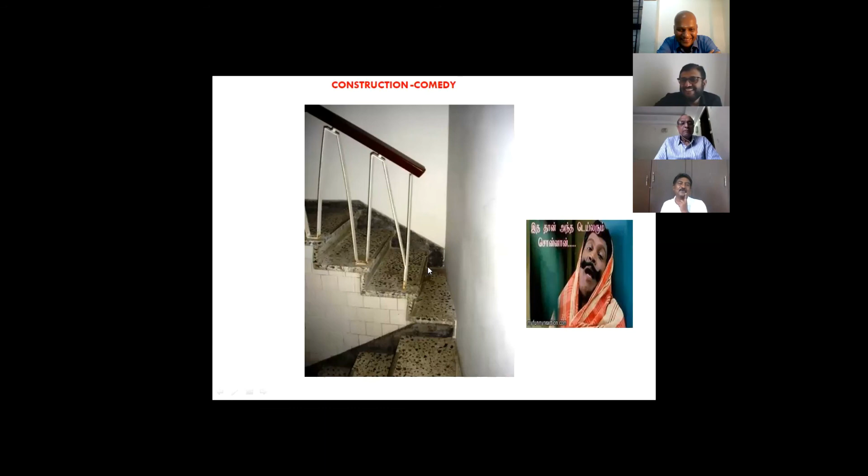See the staircase - no one can climb to the first story without a rope. See, this is the waist, landing now. Only thin persons can go out, and only kids can go up and come down. See, the architect wanted to place the staircase here only, but our structural engineer was adamant to place the column on the staircase portion only - non-integration of structural engineer and architect.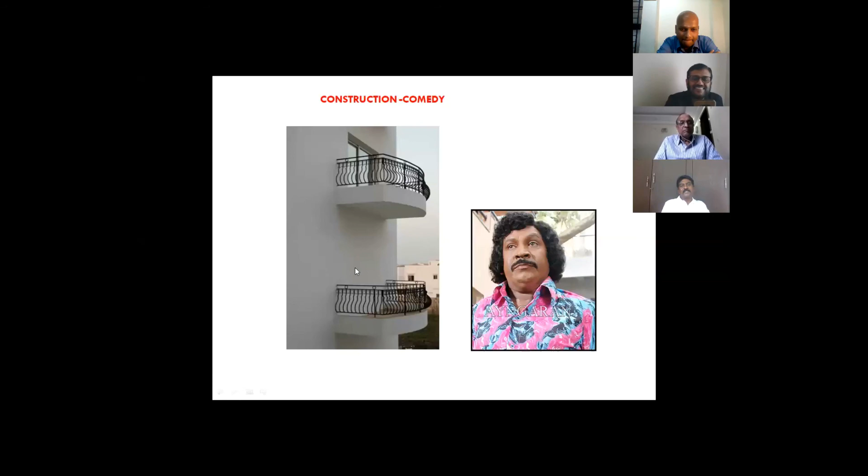See, only the road goers can use this balcony. If this fellow opens the door now - the non-integration of our government departments. No comments. This is also like that.

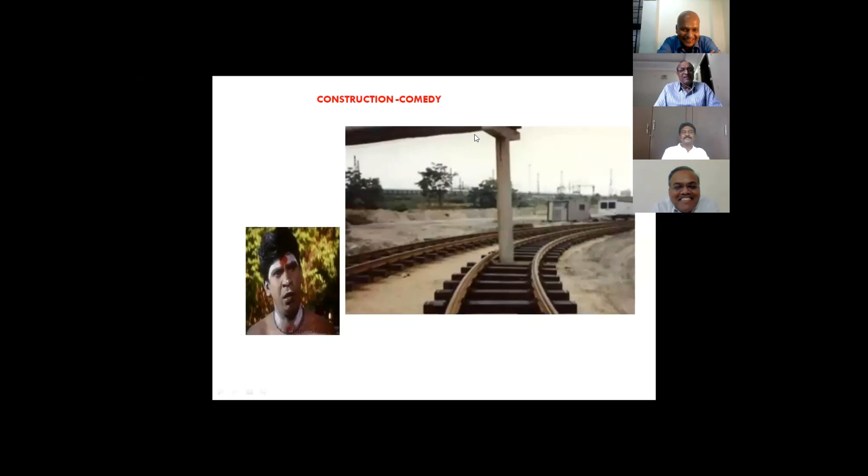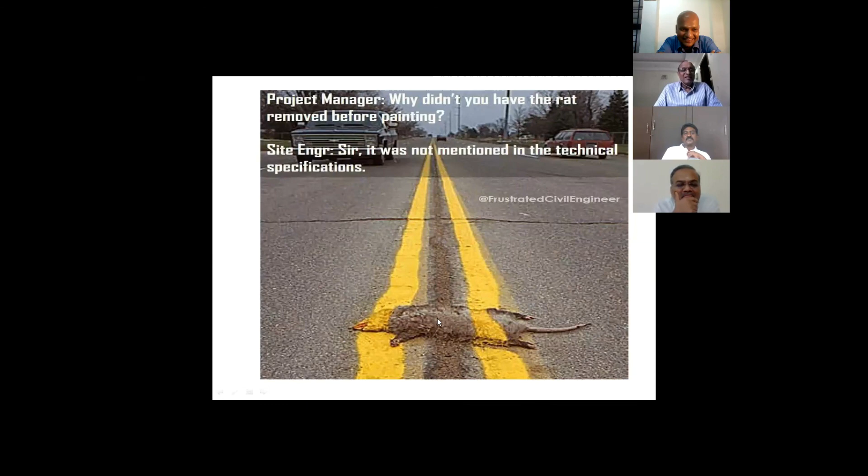This happens many times. Many will say 'this is not my job.' Project manager asks, why didn't you have the rat removed before painting? Site engineer says, no sir, it was not mentioned in the technical specification. This is how it happens at the site.

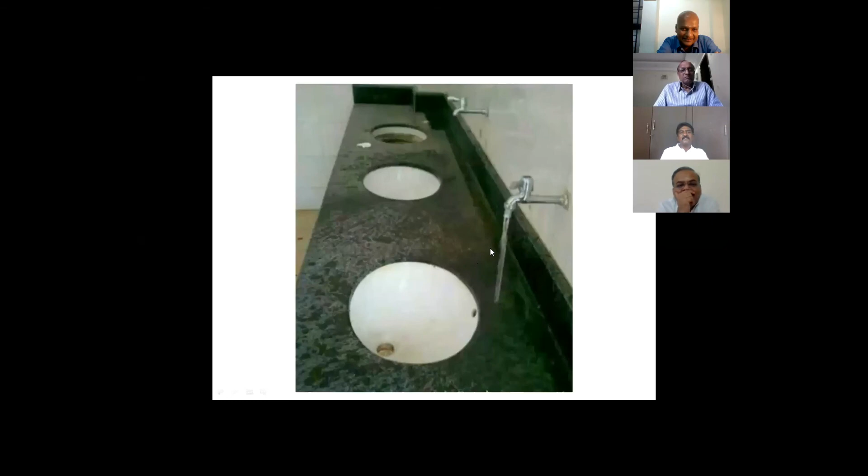See, a small little thinking could have avoided this. Once you open this, you cannot open this. See, a very little thinking has made the purpose waste.

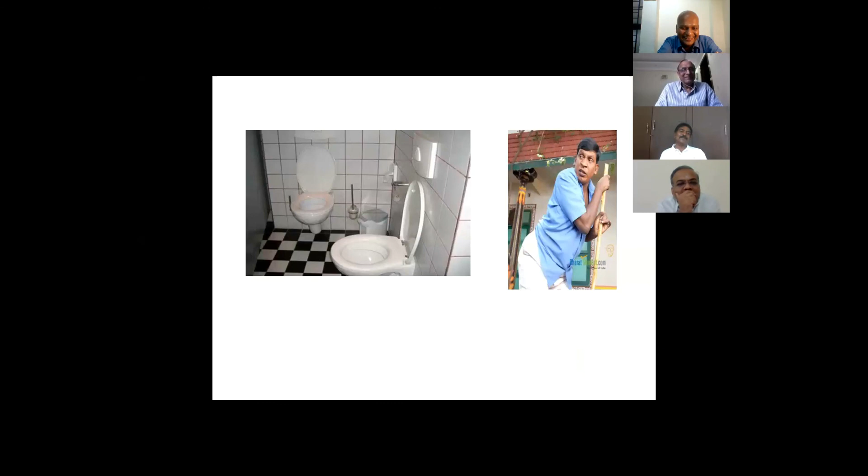See, who can use the 2 toilets at a time? No one can use the toilet - lack of common sense. Again, the opposite also, as if they are traveling in a train and talking, no seat.

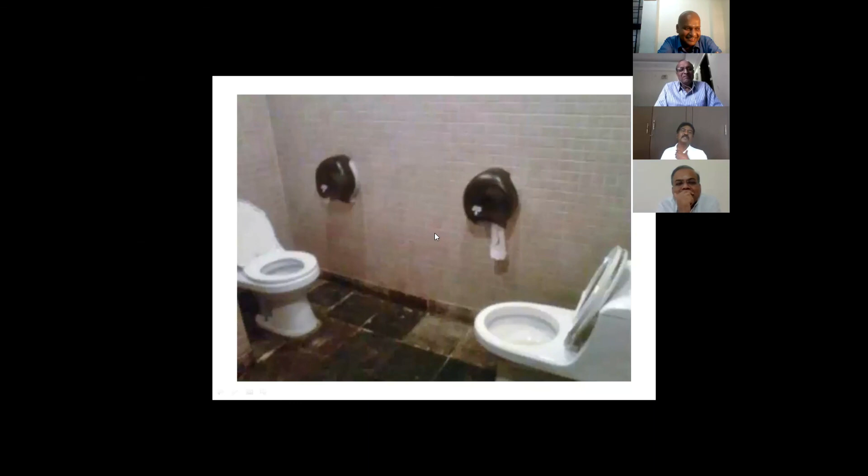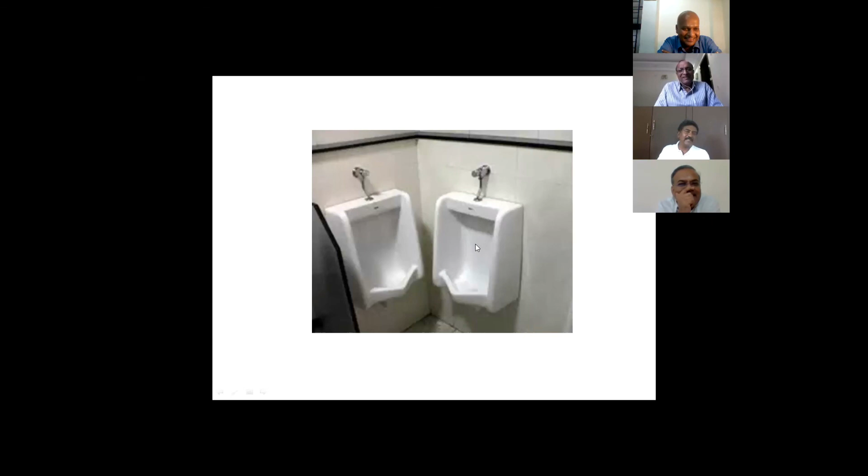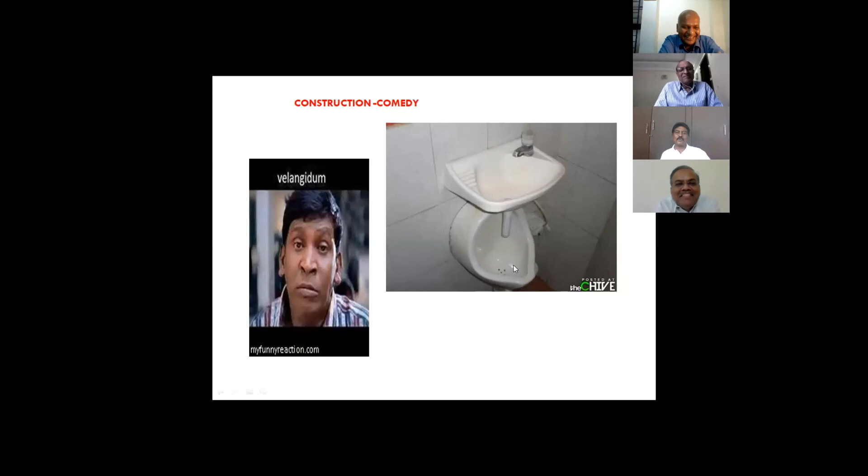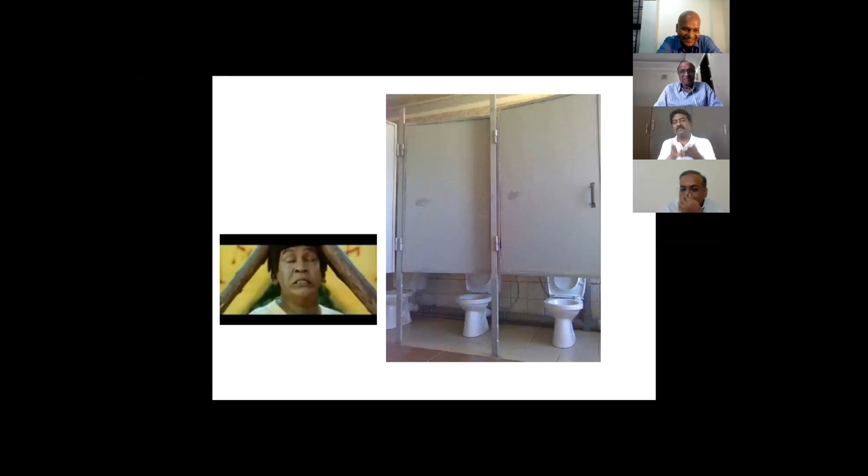We are discussing 300 mm, 230 mm and all, but what's happening in the field is like this - it needs to be streamlined with good supervision. And last slide - I'm a popular, successful structural engineer because of this.